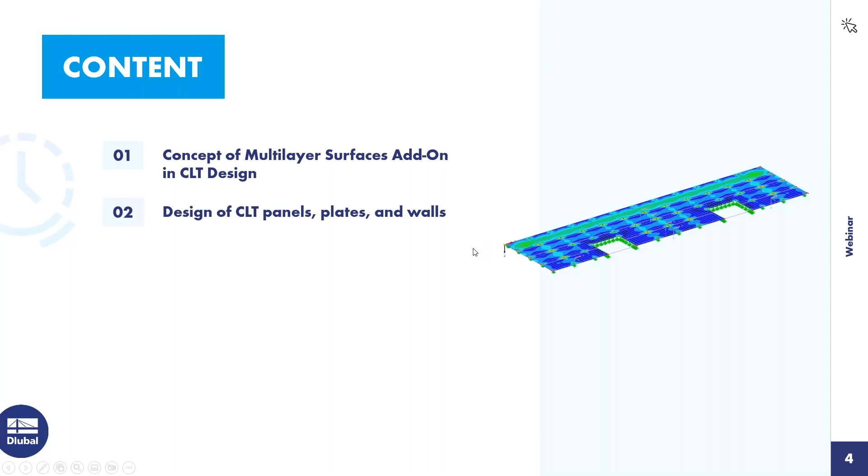The main topic is the design of CLT panels, plates, and walls. The third point is hints for modeling and results evaluation. Then I hand over the screen to Bastian and he can start.

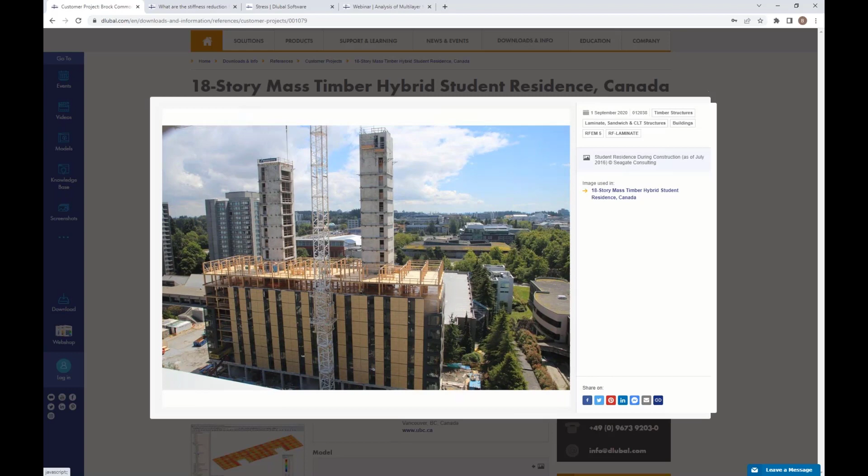Thank you. What I want to show you today is actually separated into two smaller models. The first one is based on a customer project, which we will just model from scratch and design. It's the Brock Commons building, 18 stories and 53 meters high, standing in Vancouver, Canada. It's just because it's a perfect structure, and we will actually design one story of it.

Therefore, we directly go into our new program RFEM 6 and will create a new position. I don't want to lose too many words about how you arrange models, and we are not doing a theoretical introduction into the design process, but a few words can be said about how the general model is going to be defined and how you can assign it.

First of all, we give it a name, for example 'Webinar CLT 2D Plate'. In the second register, we are activating the add-ons, or what we want to design. So what do we need to do today? Of course, we want to define a CLT floor.

For generating the stiffness, you would need the add-on multi-layer surfaces. It's written in brackets there, e.g. laminate and CLT. So it's not only for timber or CLT, it can also be used for example for glass and several other products like carbon fibers and so on. Wherever you have several layers of any kind of material lying one over the other and you want to generate a stiffness from it, this is the add-on that you would need in our portfolio.

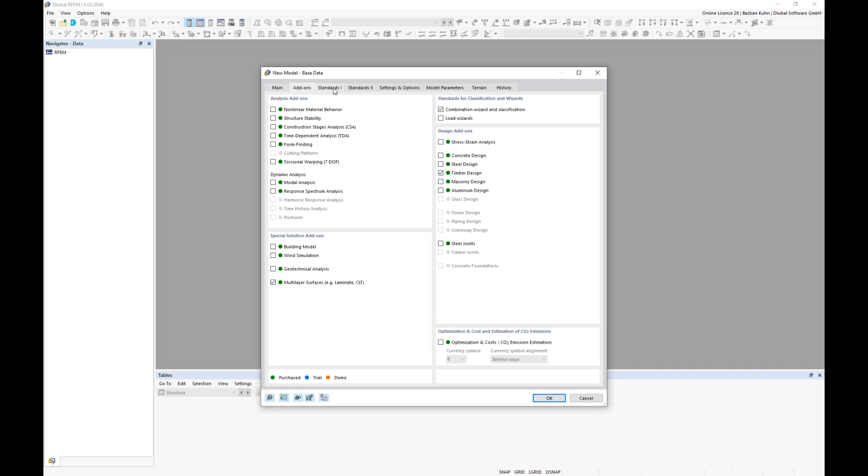We are not concentrating on load design or creation, that's why we switched that off and jump to the third register, standards, as we want to design for timber, so for CLT, and we are in Germany here.

I'm using the Eurocode with the timber annex, in case I would be designing in America, Canada, Switzerland, or elsewhere, I would have chosen another standard. I can keep the global national annex, but of course for each country in Europe there are several national annexes you can choose.

In general, what you are doing with these annexes is that you can assign deformation coefficients, the KDEF. In this case, I'm designing in moisture class 1 and therefore use KDEF 0.6, which is already predefined. But in case I want to use another value, I can choose that there.

Okay, timber design, it's the same as what counts for the load generation, and therefore we can skip that now from the explanation.

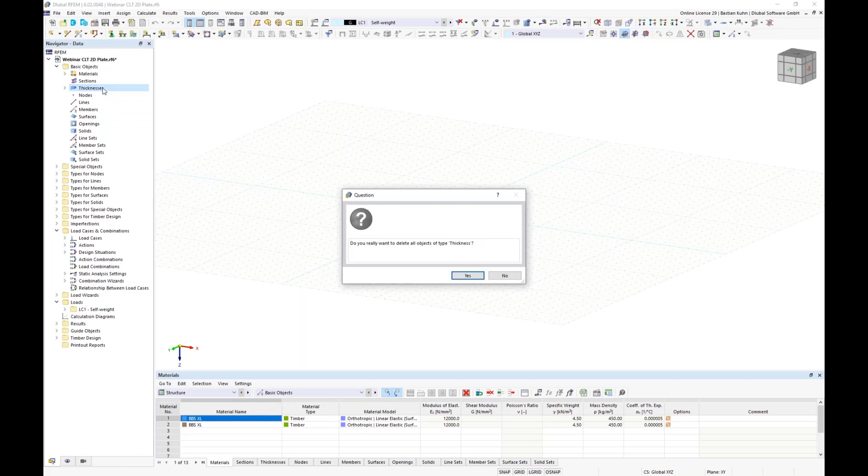Okay, then we are in the screen of RFEM 6 and directly will define the new thickness. Sorry, I wanted to start with a blank sheet, therefore I wanted to delete thickness and material because I want to show you directly what you have to do.

So if you go in here and want to define a surface, you first create a new thickness type here. And because I have activated the add-on multi-layer surface, you have here a thickness type layers, what we will be using today.

So when you choose that, you see that thickness and so on can no longer be introduced in here, but a second register is opened where you can define layers.

There you can also directly go to the material database and choose an orthotropic material model. And if you go to the library, you can see that we already have a few producers there. So there's Binderholz, Haslacher, KLH, Züblin with the Leno itself, Stora Enso, and so on.

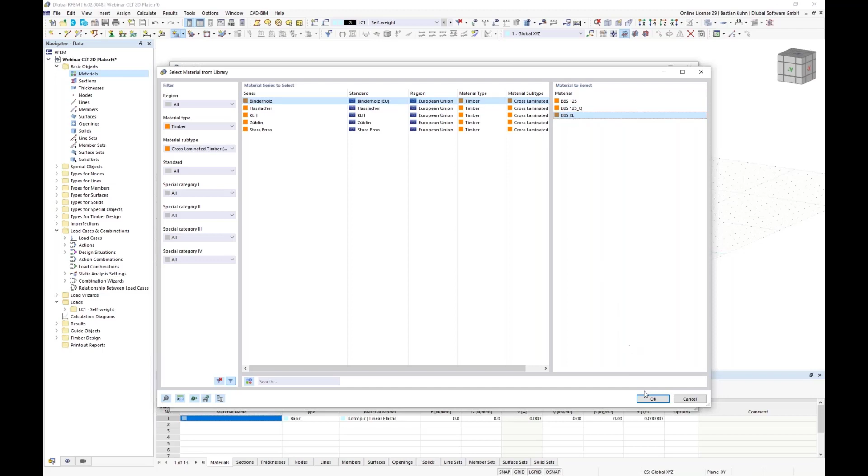I will be choosing directly Binderholz with the BBS XL because I want to show you what exactly this is doing in here, because now I've chosen this material and it took directly from the database the correct strengths which the producer, in this example Binderholz, gave us, especially the verification or the strengths for the shear stress verifications are something where you do not have any values from standard.

And so if I had chosen an ordinary C24 material, I would not even have this strength here and would have to assign them. Okay, so now this is predefined and ongoing.

It also made a stiffness of 12,000 Newton per square millimeter in the X direction, and in the Y direction it is 0. I said it already, we don't want, or we cannot give you today a theoretic introduction into our design.

Therefore, during the modeling process, I will show you our homepage where you want to take a look into the manual, and we offer also special trainings for that, what I will also want to show you. But now, just as I say, in X direction it's 12,000 Newton per square millimeter.

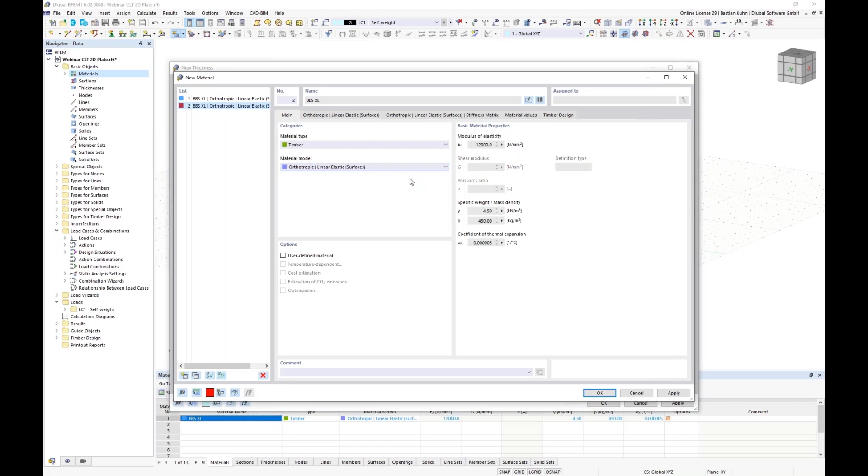So that's here. Here I'm exactly using the same material model. There's no difference in between this. So also the material values, they are the same. It's, as I said, just a graphical reason.

Yes, you see now that it's red, and it also in the rendered material afterwards, it will also be red and blue. Yeah, just a personal point.

You can also save this setup to a database, so of course we could use it for the second model that we want to create today. Therefore, we name it now Webinar CLT or whatever name you want. And then later on, we can load it from a template in here.

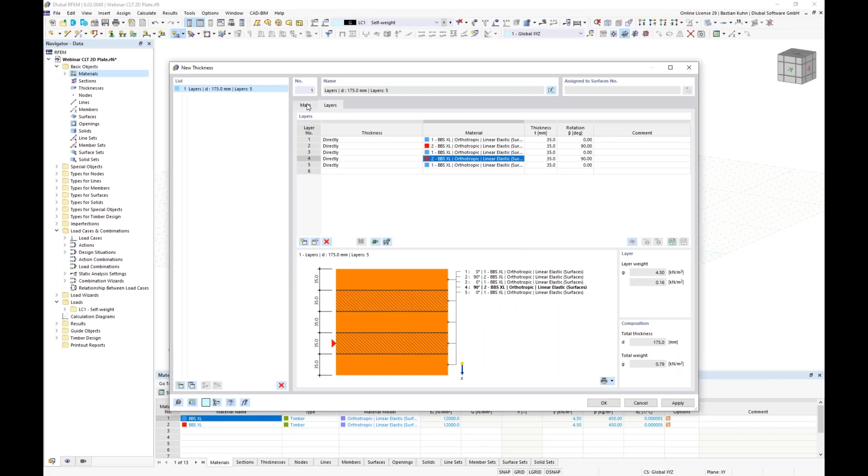Ongoing, what I missed now is the stiffness reduction, because when we are calculating with the shear stiff transfer of the load, we have to reduce the shear stiffness in some parts. So the drilling stiffness K33 and also the in-plane shear stiffness K88.

I will also show you a link later on where this is described more detailed. Here on the bottom of this register I have options especially for CLT design. I could use glue at narrow sides. The reason is that most producers glue their CLT at the narrow sides for the production process. They do not assign it for the stiffness, since the EY is still 0 there, but they use a little bit higher shear strengths. For stiffness, because of cracks in the boards, they are not increasing it or regarding it.

So in the first model, I will glue it at the narrow sides, and in the second model I will show you the difference, what happens when you switch it on or off. For now, we're using it glued.

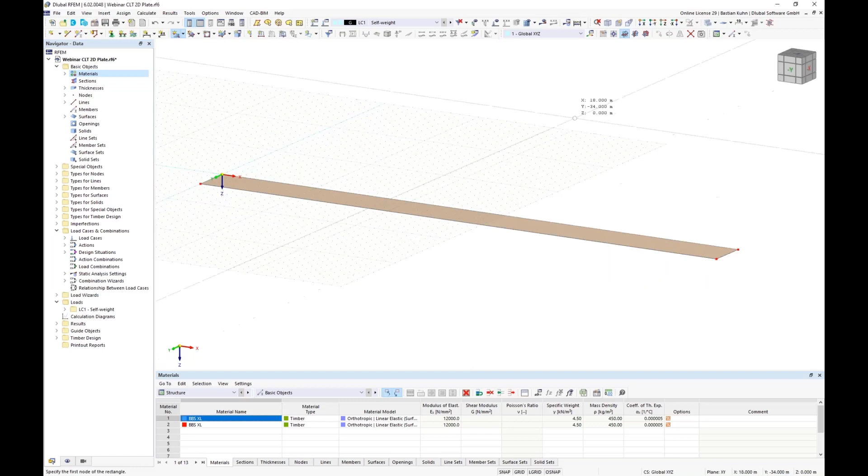Of course, I know it's not possible to produce a 55 meter long board, but there are options to calculate such things also stiff for the rotation. I want several boards with a width of 3.5 meters in the Y direction, where the higher force can or should be regarded. I'm using the dynamical size of the grid and will now copy the system 3 times into the Y direction with a value of 3.5 meters.

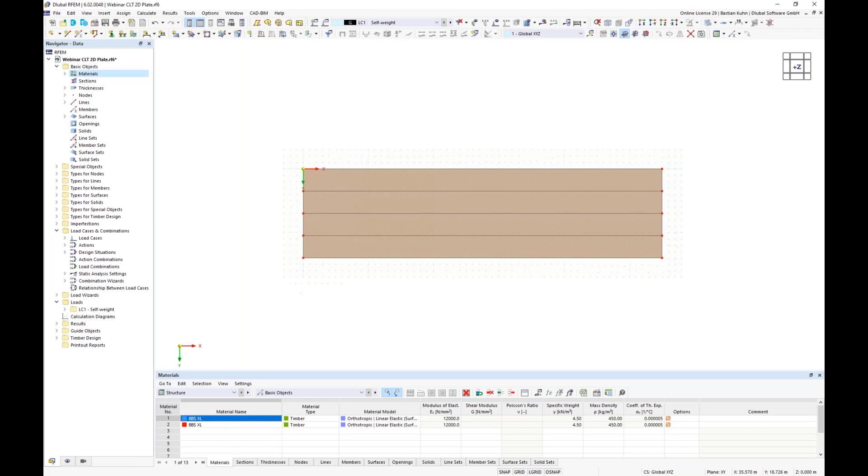So there it is, and I want to show you now why I used the rendering in there. We switch here to the view screen and say surface. No, now you cannot see it. Sorry, I have to go to model, solid model, surface, filled including thickness.

Now you see that's the only reason why I did that, because you can now see each layer in here, and it also becomes much better visible how the layers are oriented.

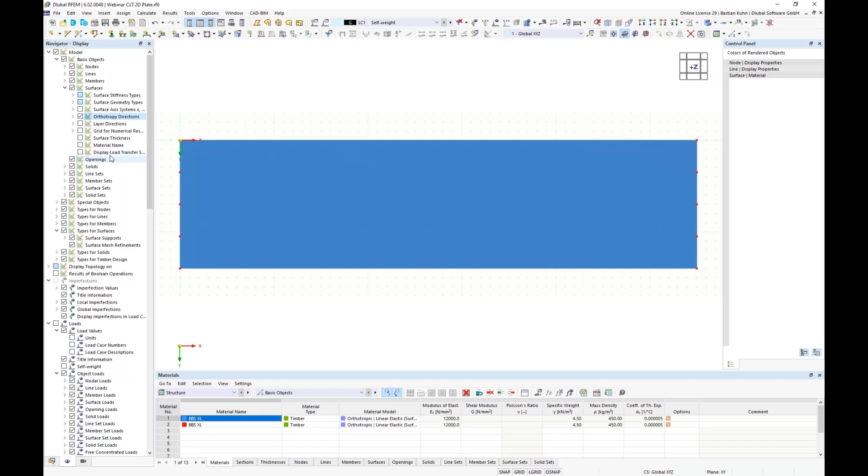We have implemented here in the surfaces a so-called orthotropic direction, because the material model that I explained is an orthotropic material. But if you switch that on, you see nothing happening. Why is it like this? Because now the layers are oriented in 0 and 90 degrees.

If you want to see how they are oriented, you first have to switch off the rendering, and then you can see how they are oriented. If you switch the indices on, you see that layers 1, 3, and 5 are oriented into the X direction, and layers 2 and 4 are oriented in the Y direction. So my main stiffness is in global X direction. That is what is important in here.

Okay, so that's the model. I can right now switch that off and divide these 2 lines by 3 nodes, because these are going to be my stiffening cores in the center. They are made from concrete, and I'm just attaching to this.

That's how it was assembled in the building in 2017. They have a width of 6 meters, and the second core is at an origin of, let me take a look, 37 meters. I'm not using the exact values from the building, just to have it close to the structure that we have in there.

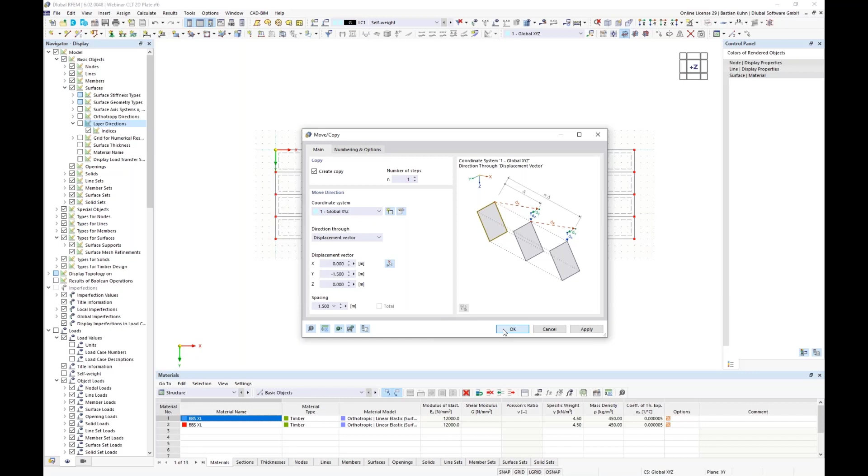This 3 nodes I will also just copy once by minus 1.5 meters. Say okay, and then I have it there, and I will draw a few lines in here and there. This one I will copy via drag and drop onto the right side. I will connect the lines in here, and then it's okay.

A very nice function, not a feature, is if you right click in here, you can divide the surfaces by integrating lines. And now you can just delete the surfaces which we do not need.

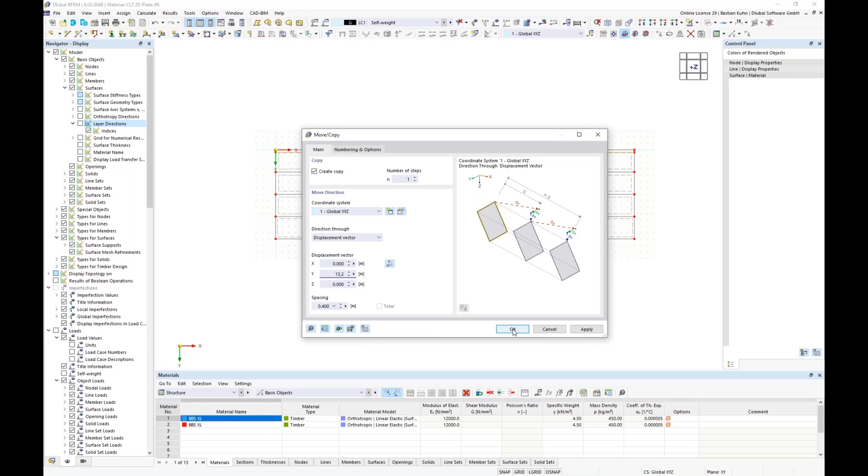The facade is running on the outside of the structure, and the supports are laying on the inside. Therefore, we are copying the outer line now about a value of 0.4 meter in the Y direction, and this one also at 13.2 meters as well, also with one copy.

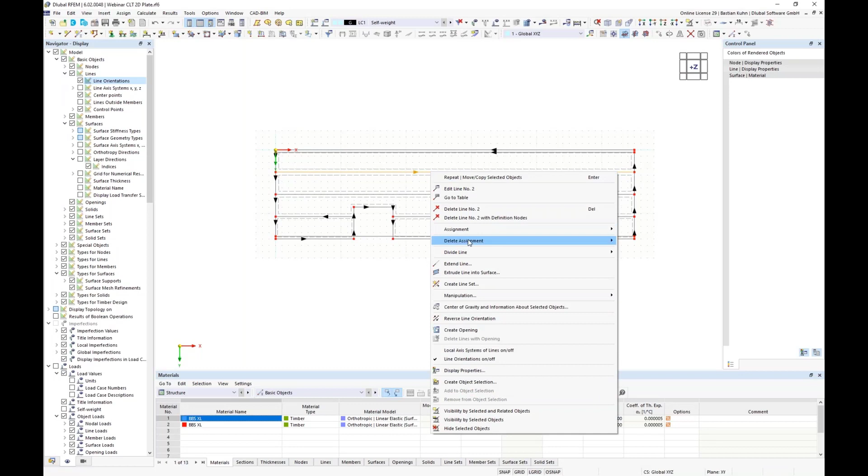I will take the inner lines, and before I do that, I have to look for the orientation of these lines, which also works via the display navigator: lines, line orientation. And now you see that this line is not in the same orientation. Therefore, I will use reverse line orientation in here.

And now that I'm in this dialog, I can also take a look if my line axis system is similar. Now that I changed it, it is important later on in order to define the slip between surface number 1, 2, and so on. I will explain that when I'm doing it. But first of all, for the supports, we want to divide the lines in here.

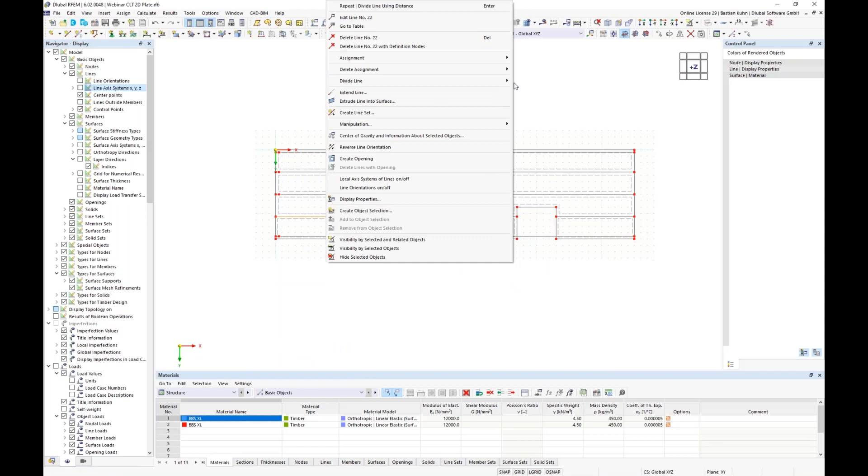Say, okay, divide line, distance from the end is 50 centimeters. Still forgot one. Sorry for that. Divide line with a distance at the end 0.5. Okay, it's not happening again because I have to do it here as well. So divide distance, and then at the start also 50 centimeters.

Okay, now this is how the supports will be running, and of course those are not enough supports. We need more columns in the structure. We now also have to divide the line by n intermediate nodes, and what's also a very nice function in RFEM 6, which has been improved compared to RFEM 5, is that you can now create a line without dividing it. You could do that in RFEM 5 as well. That's not completely true what I'm saying here, but there are more options for it now.

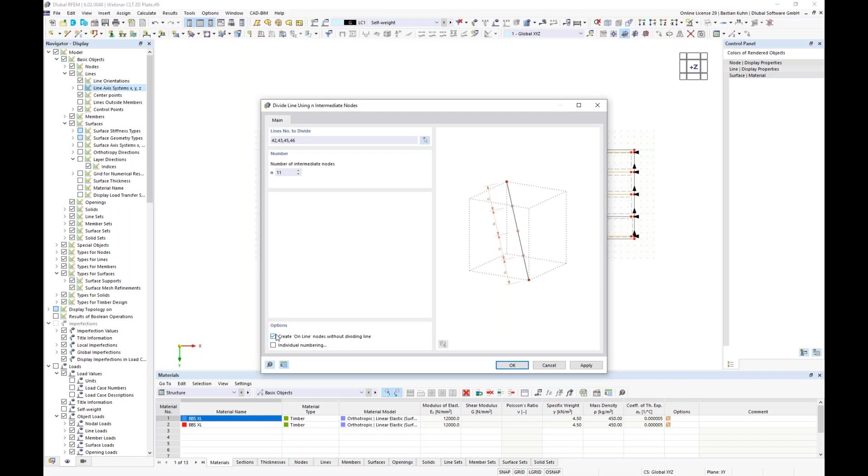So I'm copying it 11 times, I think. Yep. 11 times without dividing it. Yeah, that's all. Okay. Now the structure is nearly there. I just have to interconnect that. Actually, that's not really necessary. I could also have left it like this.

And for the inner line in here, of course, you also want to have the nodes copied there. The shift function is deselecting what you do not want to copy. And now I'm doing one copy with a value of minus 3.1 meters, and now they are there.

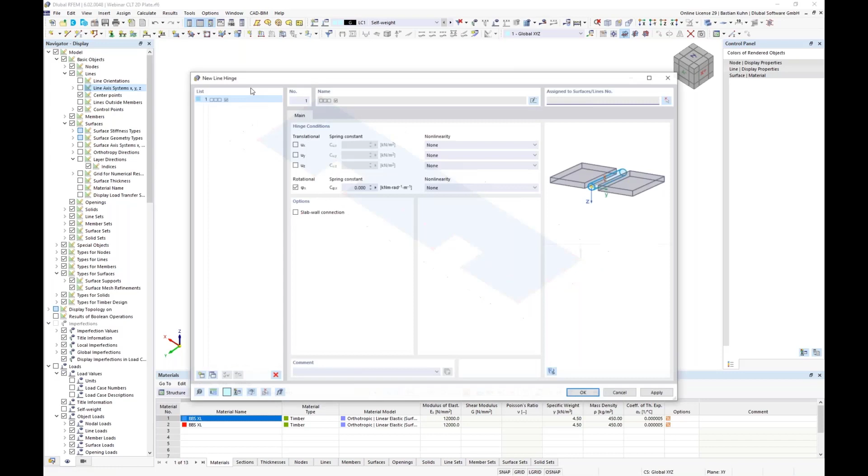Okay, I introduced it already several times now, and the question is, how can I define a slip in between this structure in here? That would be done with a line hinge. The line hinge is also very much improved in RFEM 6. If you remember RFEM 5, you had to do a lot of line hinges on such a structure, and now it is possible to do it for only one object. But still, you would have to define a slip here in UX and UY direction.

And therefore, for the first time in this presentation, I want to jump out a little bit and show you a very simple calculation in Excel. I just want you to know how I get this value and not grab it from heaven or somewhere. I'm calculating a slip between the two plates in here based on some very simple equations.

You see it here, K ser equals the density times height, times the diameter of the connection, divided by 23. That's it. And it gives me for a screw a value of 2,576. What's always important in your design process is how many connections per meter you can assign. So if you say 3 in this example, it will give you a stiffness of 7,728. If you use 4, 10,000 and so on. So the equation is very simple. You only add these together.

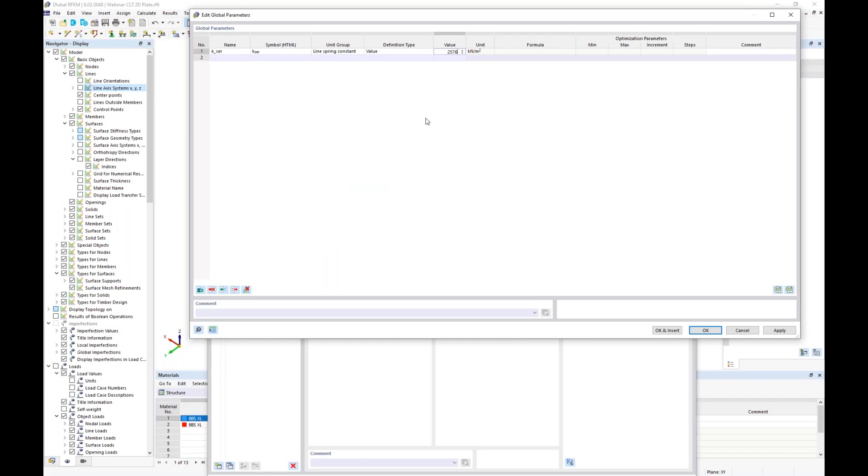Sorry for this little excursion, but as I said, I didn't want to present it as heaven sent. If you have this value for the slip modulus, you can go into our global parameters and name it, in this case, K ser. In unit groups, you already have a lot of values that you could use, and we want line spring constant, and this gives you this value in here. Okay, insert, and now it's there.

So that is not really a big step, because if you only have this, what does it bring you? You design the structure and find out, okay, 3 connectors, that's not enough. I need 4. I need it stiffer. Then you always have to jump in here and define it. And also for your documentation, the printout report, you have nothing.

So how can you improve that? If you go to this info box in here, you see there's the option to insert object properties. And there are now also very, very many options that you can do. But we just want the simplest one of it, line hinges and comment. Say okay. And you see right now, it's a simple JavaScript function that I'm using in here.

But it has an intelligence behind, because it already tells me, okay, what you're doing here is an error. It's something wrong. And what is wrong? Okay, I need to tell the software what object I want to assign the comment to. So in this case, that's the object 1. I just have to type it here. You see it here in the list on the left side. And I forgot the addition in here. So, and now you see, well, the value is still 0, but I have something in here.

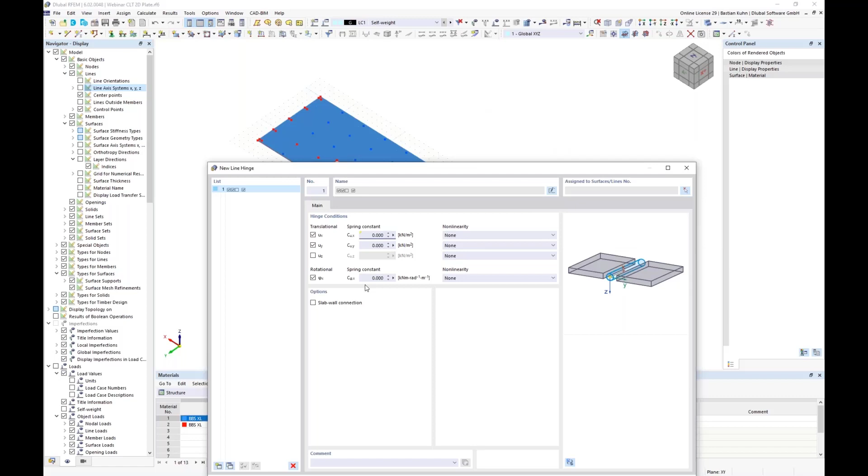For my documentation, I'm using this little slice in here. That's just something you need to Google and will find out directly. So if you say, okay, nothing changed, that's a little bit annoying. Why is it not sending that value that I want? Because you have to define it here in the comment. And if you say 3 connectors, or you can also say 3 screws or whatever it is, first of all, this comment is taken to the printout report. I will show you after we did the design.

And now if you find out during the process, okay, 3 is not enough, I need to do 4, or it has just to be stiffer, you can just define it here, and it's changed in real time. Well, of course, right now I know 3 is more than enough for this structure, because the horizontal load that I'm assigning here today is not that big. But yeah, that's something you will always find out during the design process.

Okay, so then second, we do it also for the Y direction, because according to the spring laws, you need to have it in the plate area for X and Y direction. Rotational spring constant: with newer research, it is also possible to define a value in here, but right now I'm leaving 0. Of course, you could have something similar like I did for X and Y direction, also for the rotation. And in Z direction it is not necessary to define any kind of slip. Okay, I screwed it up a little bit, but it does not matter, because I left the dialog. I did actually not want to do that.

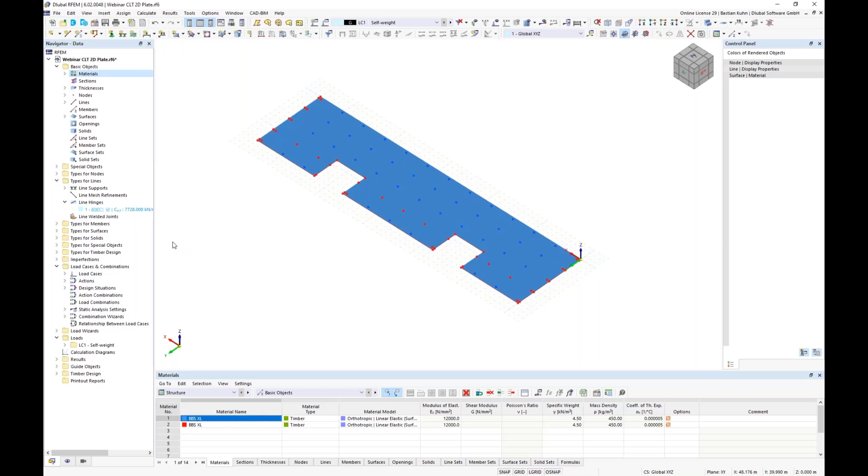If you jump into types for lines, line hinge, it gives me the opportunity to show you the advantage of it, because in RFEM 5, you would now have to open the dialog once again and also define the line hinge once again. But as this is an object now here, I do not have to do that, and can now do it correctly and choose the surface and assign it to this line, this line, this line. So wherever I'm assigning it, I'm defining a slip. So in between this plate and this plate is defined a slip, and this plate and this plate. And now a slip is missing between this plate and this plate.

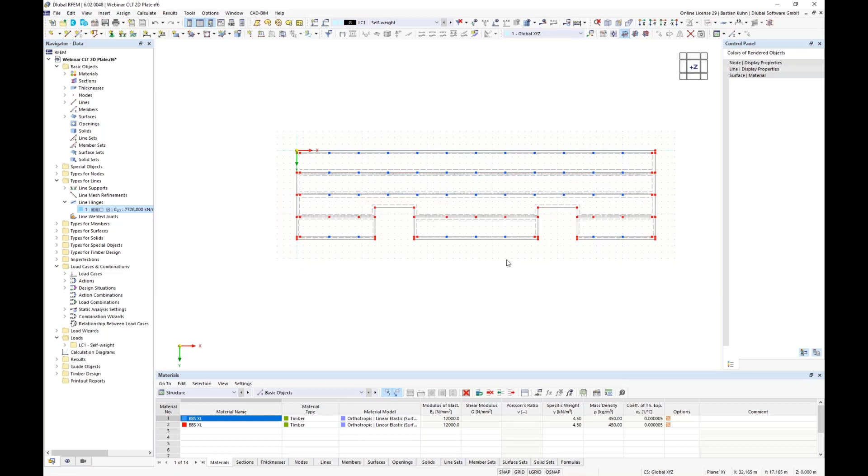And once again, back in RFEM 5, you would have to define the whole stuff once again. But in here, I just can click there, and it's absolutely no deal. So that's, to me, a big, big advantage of the new workflow. Okay, it's a little bit small. Maybe I will just increase the size a little bit, and go actually in Z direction again. That's now defined, and I can define the supports that are representing the columns underneath. They are very simple. They are just using force in UZ direction and nothing else. Say okay, and assign it in here and in there and there and there.

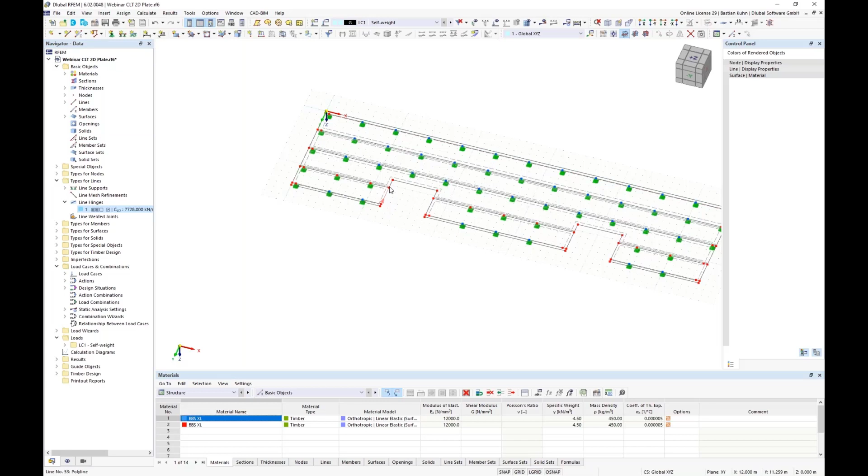That's also, to me at least, a little bit small, and we can maybe just increase it a little bit. Okay. What else do we need? In this case, when there's horizontal force, it will just move away, and we need to define the line supports from the core, and that would work via line supports, define or edit the existing ones, and we use actually the same intelligence here, but for local systems, and because we want the force just to act in longitudinal direction of the line, I will just release UX, or just give the slip to UX.

I will complete the release. That's how I want to do it. And then I'm using the same like before, using K ser. Do not make the mistake from before. And now if you go in here, it's obviously not line hinge what we want to do now, but line supports. And they're also just a simplest function comment.

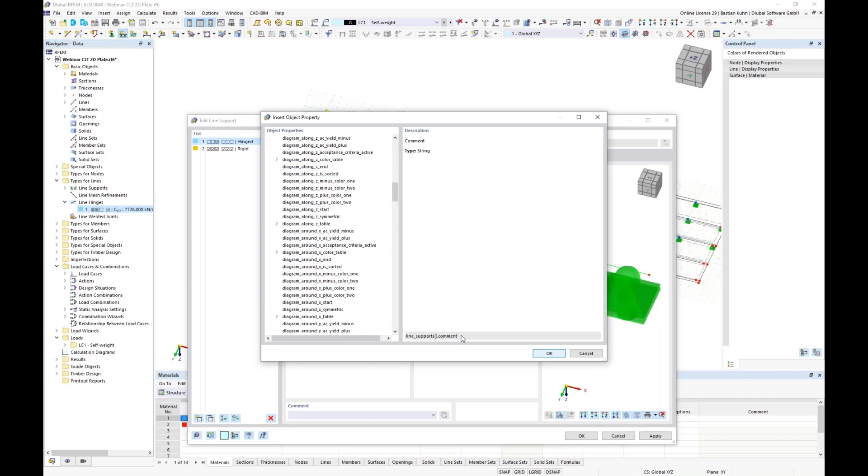You see in here, you can do a whole bunch of stuff with this. So you can have diagrams with forces coming from other directions than UX and so on. That's all included in here. But yeah, once again, we use the simplest one. So with line support 1 point, same function like before, 0.1 and this, and no error, and then we just type it here, say, what did we write? I forgot it. 3 screws, I think.

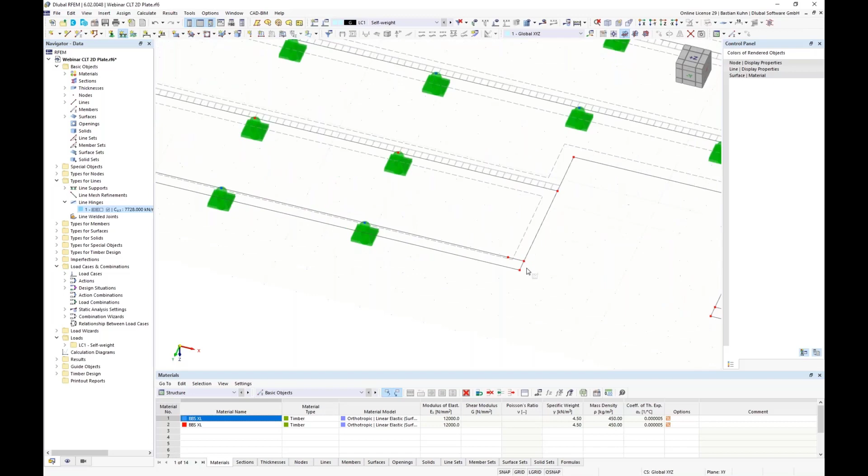And now we have it here. Yeah, works the same way. Trust me, it is like this. All right, 3, this. Okay. But we need to assign it to the lines. That I should not forget. So where do we want it? There, and there. And of course there, and there.

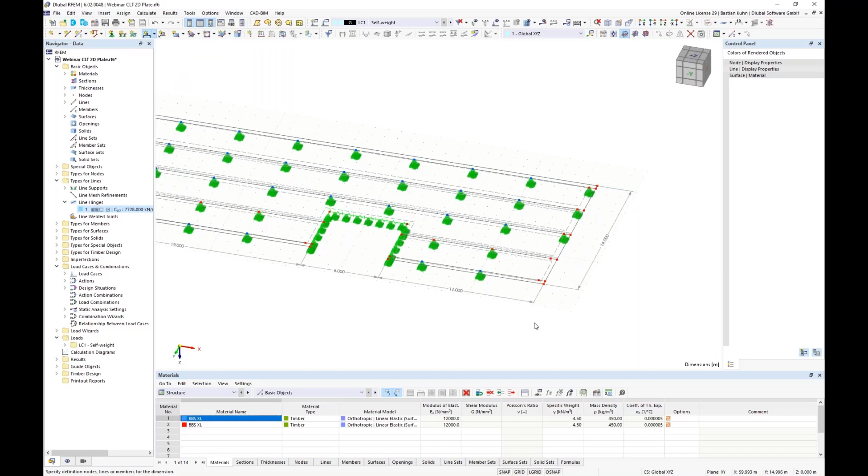So the model is now already there. Maybe we want to have some dimensions for it as well, just to have it a little bit nicer. And maybe we are actually directly starting the printout report, because there's something quite nice in the new RFEM 6 that I want to show you once we have the dimensioning ready. So okay, maybe you would do it differently when you are making the design of it, but for this I think it is now all right.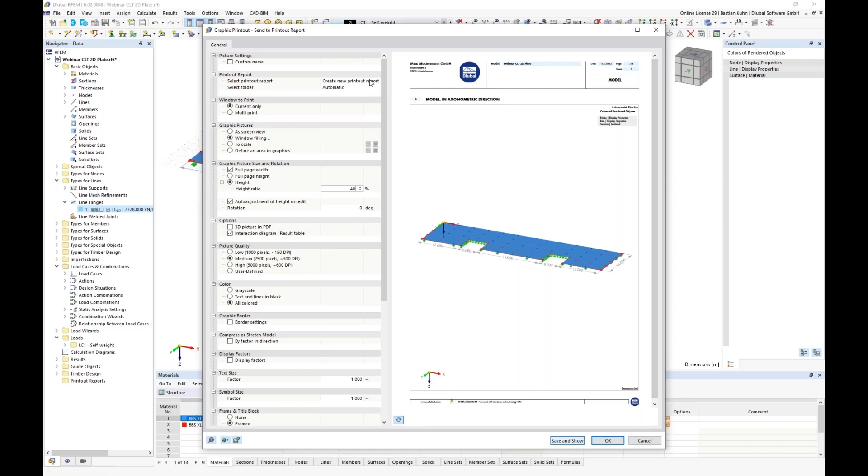And we print this graphic to the printout report, because in RFEM 6 it is possible to have the printout report opened when you are working on the model. And we will do that. We will maybe use it window filling, and maybe not, we take maybe 40% of the height. Save and show. I did not choose a printout report. Actually, I should have selected the printout report in here.

Here. So it works in the same way like the material database before. You have here templates you can choose. And I actually have created one for today's webinar especially, where I selected and deselected a whole bunch of stuff. I think we will now assign it and then go back to the design process. All right, it's generating it.

Gives me time to drink coffee, a small one. Okay, now it's there.

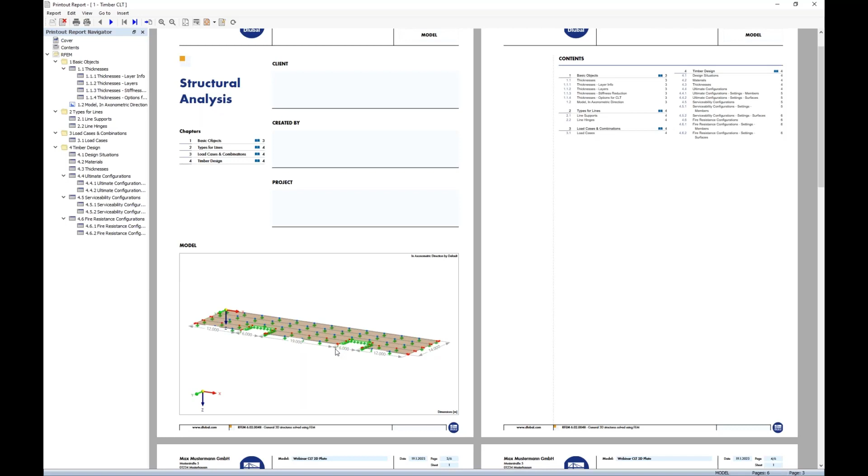Actually, I could have opened it, but we're not doing a webinar about the printout report today, but of course I want to show you what kind of points you can implement in there for CLT or for timber design in general. Okay, but here's now the model, and that's it so far. And we go back to the design process and introduce the load. Deactivate all dimensions, because I don't want to see them any longer.

And introduce the load. So first of all, we're doing a horizontal force just to have a deformation in Y direction of 1 kilonewton per meter. If you have looked at the building, it is standing in one of the highest earthquake areas around the world, so there's probably more force than 1 kilonewton per meter. Also from wind, there's probably more force. But yeah, maybe we are in the ground floor here and just have some small force.

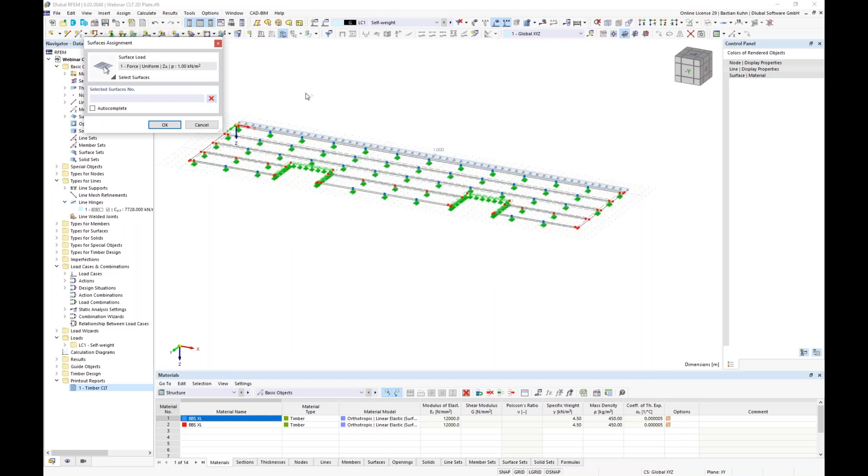Yeah, we also take a small value in load case 1 from self weight and say okay, we have that here. And now we define for each plate a live load. So this will be 5 times. Okay, and now also one of the advantages if you compare it with RFEM 5, and yeah, I worked long years with RFEM 5, I'm still comparing it, but if you are new, you do not have to compare it.

In RFEM 5, you would have to define the surface on load case 2, say okay, leave the dialog, and then choose the second, or in this case, the third load case, assign it there, and so on. This is, as you see in here, no longer necessary. All right. And last but not least, this one.

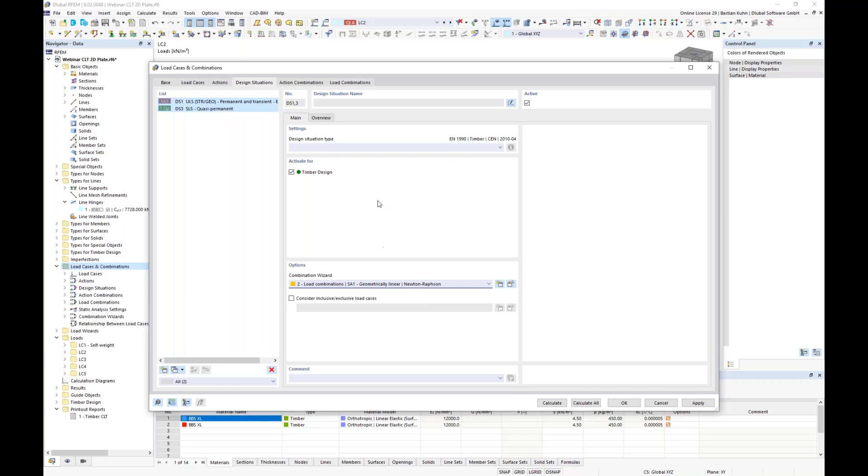Okay, so we can now also check if we did that all correctly. It's all correct. And go into the load cases and combinations. As I said, we're choosing timber here as a standard group, and for the design situation I would just use quasi-permanent. The other ones I'm not interested in, and I'm calculating according to first-order theory and automatically create my combinations for that. And now they are here, say okay.

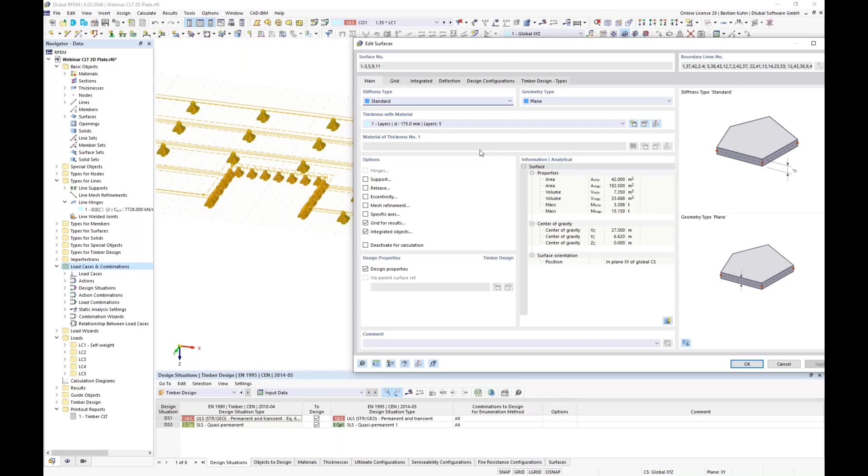And now I could have started with the design in the add-on timber design because I have activated that in the basic data, but I have to show you the objects that you can or should take care of. If you once again compare that with RFEM 5, there you have the design add-ons Laminate and Timber Pro, and all the things you have defined in these add-ons are now moved in RFEM 6 into the objects. In this case, we are designing surfaces, and so here you define it in the surface.

First of all, if you look for the deflection, you can choose deformed or undeformed system, but that's not what I'm up to. I want to show you a plate is always a little bit problematic when it comes to no clear deformation where you should consider a reference length too. So the distance between this support here on my node and this is actually 4.5 meters, if you remember what I did by copying them.

But how do you want to regard it with this other side? And therefore I choose 5 meters, because I'm choosing the difference between this point here, and you cannot see it now, but the other point there. So to me, that is now on the safe side. And if deformation gives me problems, I anyway would have to do a more detailed deflection analysis. Okay, I hope that's explaining it a little bit.

Ultimate limit state configurations. We have a combination for ultimate limit state configuration, and therefore, of course, we also have to look for the objects. The first two registers are for members, and the third one is for surfaces. Maybe most interesting for the designer is that now for CLT, it's also possible to consider a system strength factor. So that would be possible in here, and then you could increase it to 1.1, for example. The other ones are not important for surfaces, and therefore I'm not explaining them.

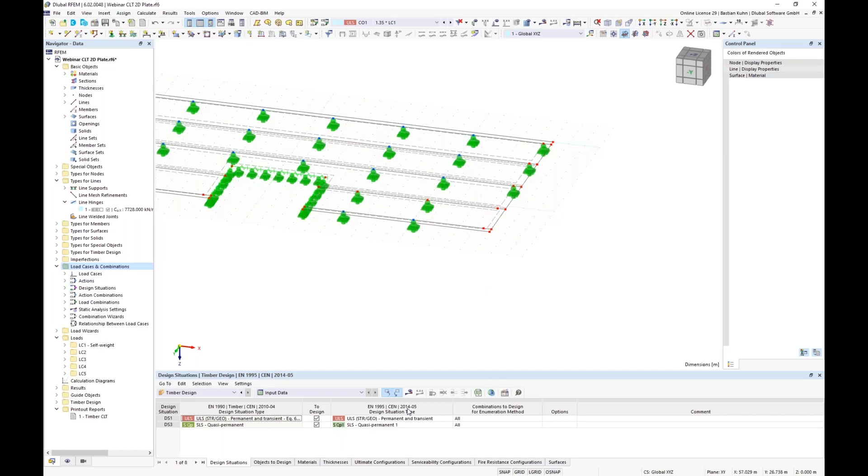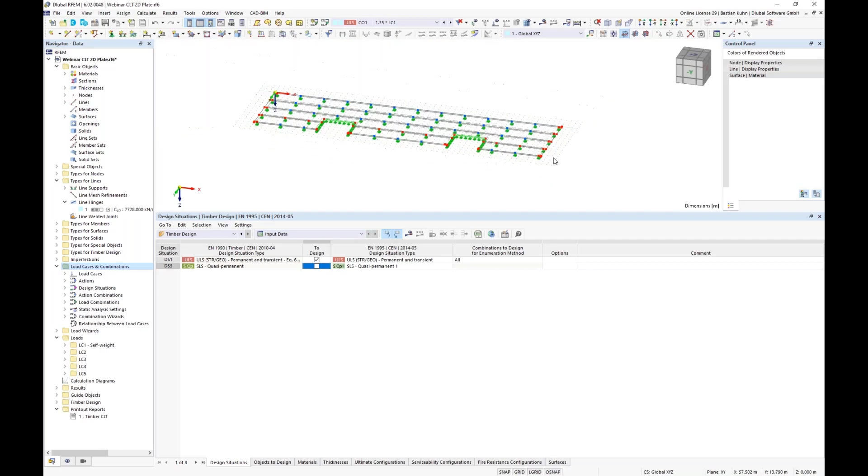Enough explanation. In the first step, I can also just calculate the ultimate limit state, because serviceability I could design when I'm sure that everything else is working correctly. Actually, see what I missed here. Here a support is missing there and also there. Maybe do some checking before we start, but the rest looks great. And I will start the design process and will give you small explanations about how the stiffness is generated and what is actually done in there. That's what I wanted to show you right away. Okay, that's opening now on the other screen.

Ta-da! Hold on. Oh, that's confusing me. I hope you see it now. Can you see it now? Maybe my colleagues can tell me. Andreas, can you see the presentation now? Yes. Perfect. Okay.

If you remember how we introduced the layers in there, just a small theoretical explanation of that. We defined a stiffness of Ex and Ey, and also a Poisson's ratio, and of course a shear modulus. And that is now defined in every layer. From each of these layers, we are calculating a global stiffness matrix, which is then exported into RFEM.

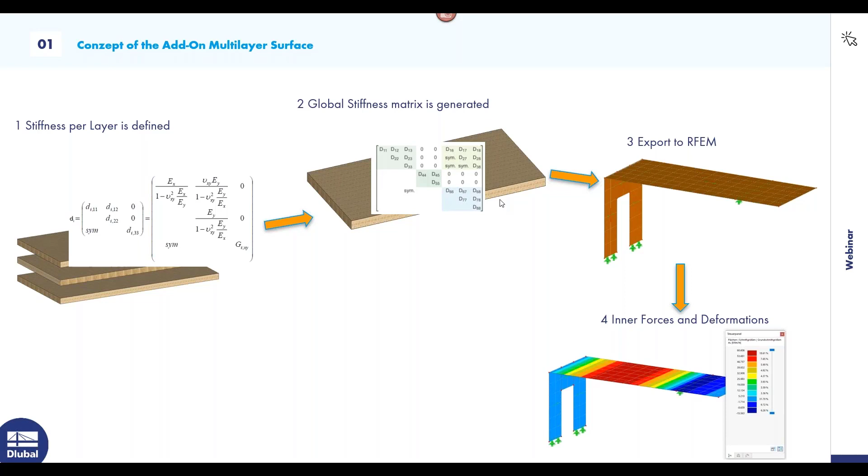And in RFEM, we calculate deformations, stresses, and inner forces on one plate, not on the whole layers, but on one plate. And these inner forces are then transferred into every layer of it. That's actually the theory behind that.

So let's see if we can get RFEM 6 back now, or maybe the homepage back. I don't know. Right now, my screen is a little bit black. We can take a look. Transfer. Yeah. Okay, there you go. I did the webinar in German language on Tuesday. There were problems with my screen. I think that's based on the software, sorry, GoToWebinar. I don't know. Okay.

We can take a look at the results in RFEM 6. Hold on. How did we name it? I think it was this one. Yeah. Okay, so you see, we have now an overloading, which is not the desired behavior because we want to be green and we want to be smaller than 1.

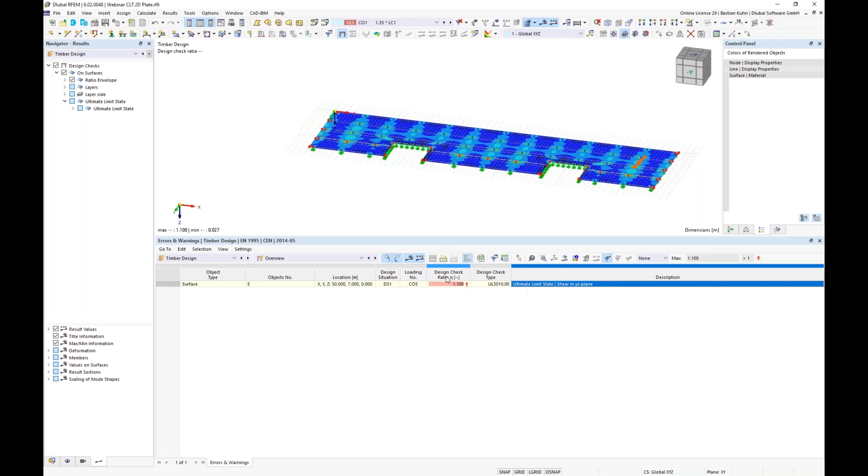But if you look into the details of it, you can see that the overloading is just in a very small spot in here. I can actually switch off the nodal supports. They are not necessary to me here anymore. There. Okay. And if you realize that in reality there's not a needle standing underneath this point, but a column with a diameter of, let's say, 40 centimeters or something else, it's obvious that you should not take the force in this spot, but you should take the force somewhere outside. And I will actually show you how to do that.

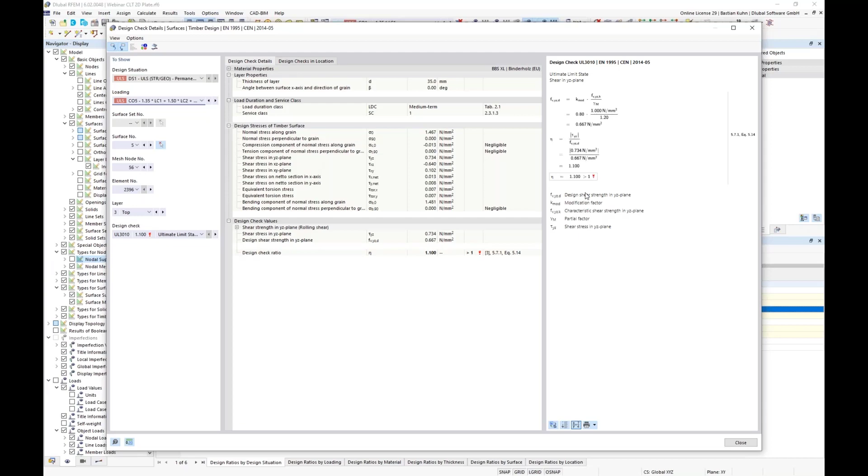In the literature, you will find this described as a so-called punch-through verification. But before we do that, we first take a look into the verification itself. Via double click, we go into the details of it. You see now that in RFEM 6 we have quite nice equations shown here, and they are also filled with values. So you have the shear strength shown here. You have the option to take a look at the ratio over the section itself. Or you see here now the several layers that we have defined. You can switch it to stress and take a look into it.

So sigma x, the bending stress, you see that where you have a high stiffness and high loading, you have a higher stress. So that can all be compared here. And of course, we also want to take a look at the shear stress, and it is usually in the center of your section. That's the same for beams, and counts for plates as well.

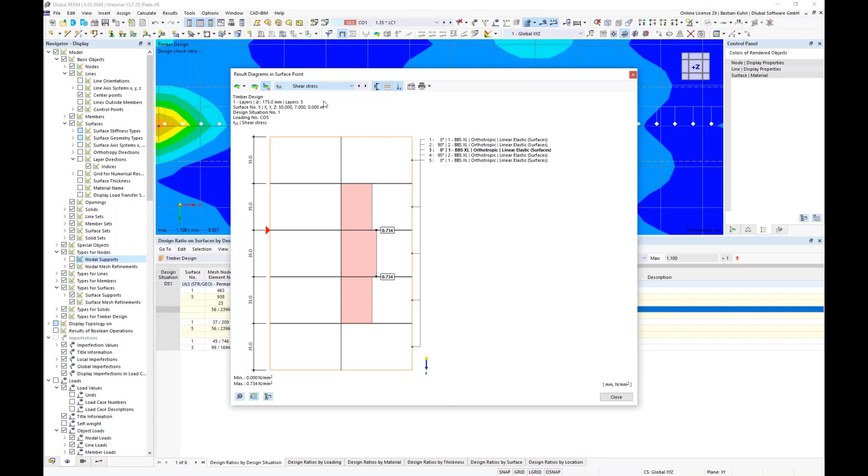Okay, you could also print such things, no, maybe not this one, but maybe this one, into the printout report. It's opened in the back, so we can just say, yeah, take it like this, maybe a smaller height. Actually, that's okay. So we just say okay, and then it's already in the printout report. We will do that later on. Say close, or I could have also left it open. It does not really matter.

What else is new and possible and very much nicer than it was in RFEM 5? If you go to the result navigator here, you can see that first of all, you now have a ratio envelope of all stresses in here. You have them here and can print them to the protocol directly, or use them for your analysis as well. You can separate between several stresses and also between several, okay, we just have one layer in here, but several layer sides, for example, top, middle, and bottom. Actually, that was not true. Here, I can choose the layer. So for shear, you would probably use one of the inner ones, and for bending, you would probably use the outer ones. That's the first nice function.

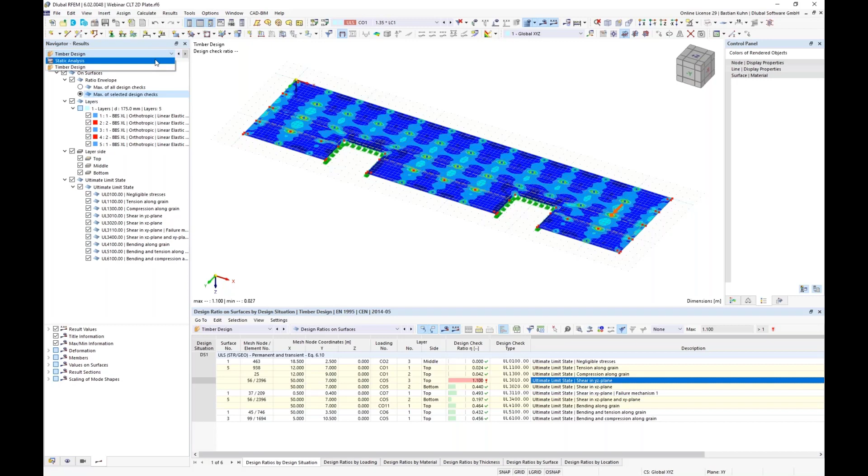If we jump back to the static analysis itself, for the connection design, when you go to the static analysis, you can see there the global deformation and compare it just to get a feeling of what's going on in here. You could also take a look here for each layer at your stresses and also your strains. That's quite interesting for some cases, I think.

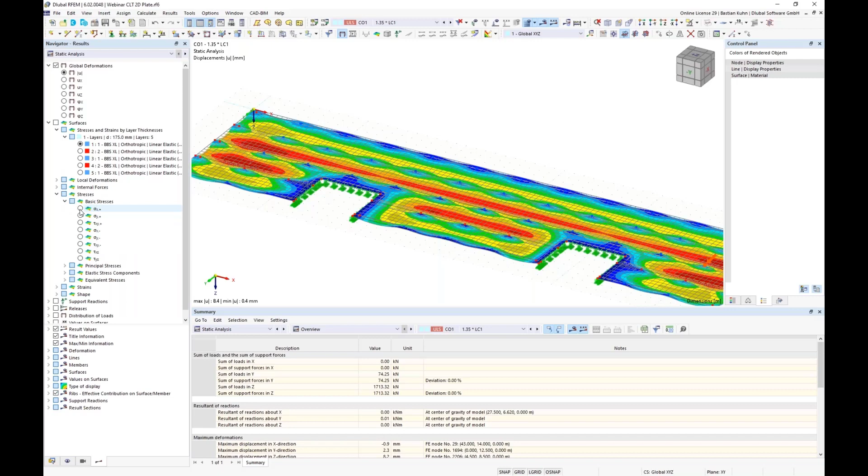If you compare sigma x on the negative side of the surface, you see a maximum value of 3.8 at the top, and if you go to the middle, it's actually quite low. If you go to the bottom of the section and choose sigma x on the positive side, it gives you the same value as the top side. So that's also something you could use for your analysis.

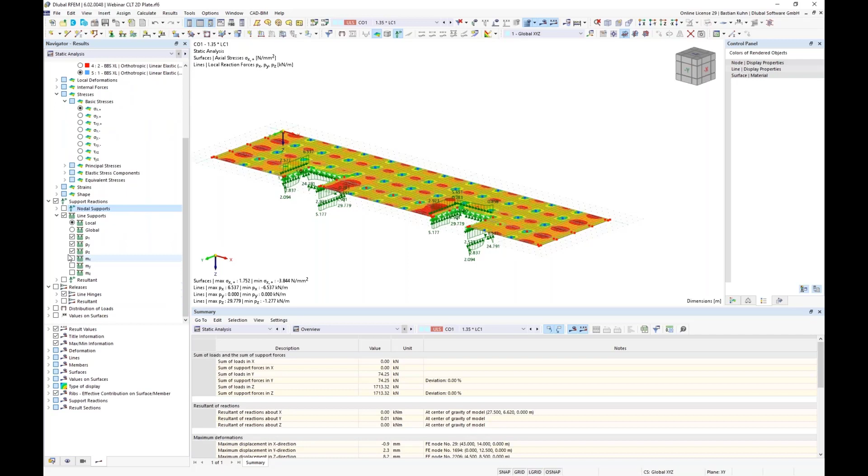Going on, first we want to look at static analysis for the connection design, so we have options here. First, the more simple verification of the connection is in the line support, because there we have a slip defined in x direction. So this is the force you need to connect with your connectors in the x direction, or in the longitudinal direction of your line.

But also for the line hinge, you can take a look at the force here, and this is the force you have to assign between this panel and this panel. Now let's take a look where the maximum value is. Well, it doesn't matter, it's here. It's quite a smooth value, and you do not have any singularity effect in the connection itself.

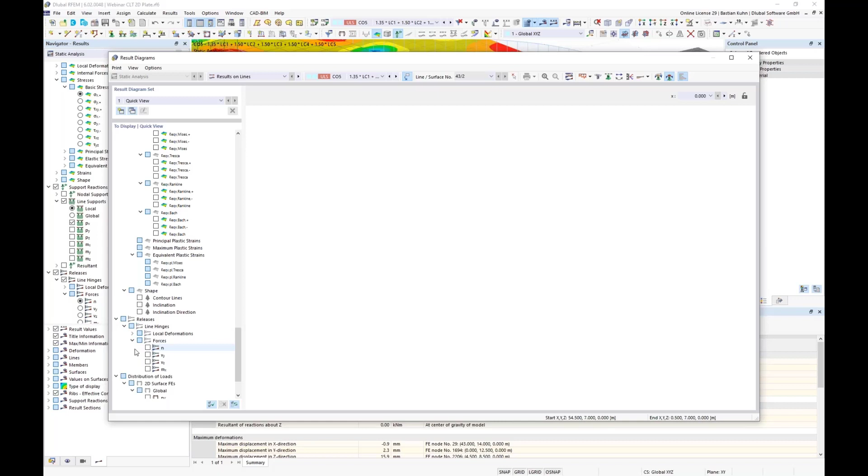But nevertheless, from time to time you will face this problem. So in the result diagram, maybe we will switch to one of the bigger ratios. In the result diagram, you have the option to smooth these values as well. You can say force, normal force, and if you look at the values, say okay, 10 meter, 12 meter, that's where I'm averaging, or where I would be able to average my results.

And if you do that and say, start 0 and 12 meter, let's say it like this, you see that you have the force that has to be attached by connectors, whatever it is, 9.464 kilonewton, and per meter you need a force of 0.789.

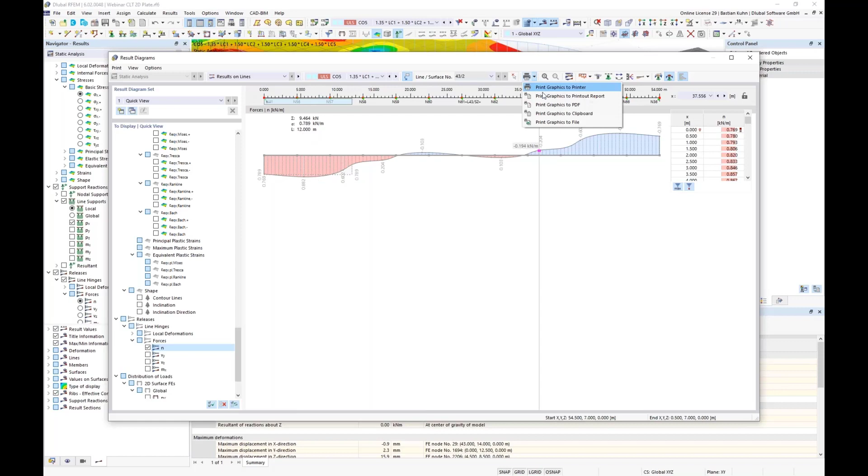So this is probably something we want to have in the printout report. We will say, maybe we will not use the full height, but something like this should be in there, and leave the dialog. Also this result diagram I would not need to close. If you work with two screens, sadly in our presentation tool we do not have the option to show two screens at the same time. But yeah, this also does not need to be closed.

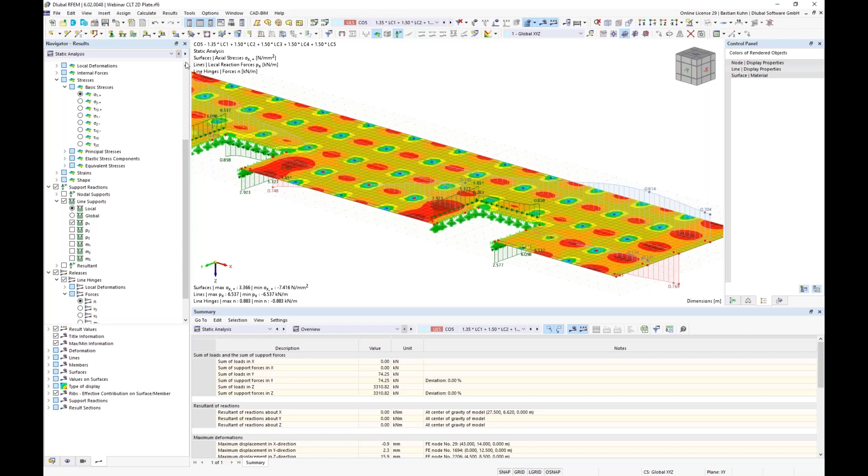Okay, but back to the design of the timber. So when you look for that, we still have the overloading in here. How can you get rid of that? It's actually similar to what I showed you with the smoothing of the result diagrams, it's just called differently. It's called insert special object, surface results adjustment. This is just for smoothing your result.

So now if we say we have a column of a width or diameter of 40 centimeters, it is definitely possible to use a dimension of 60 centimeters. I will show you the reason right away.

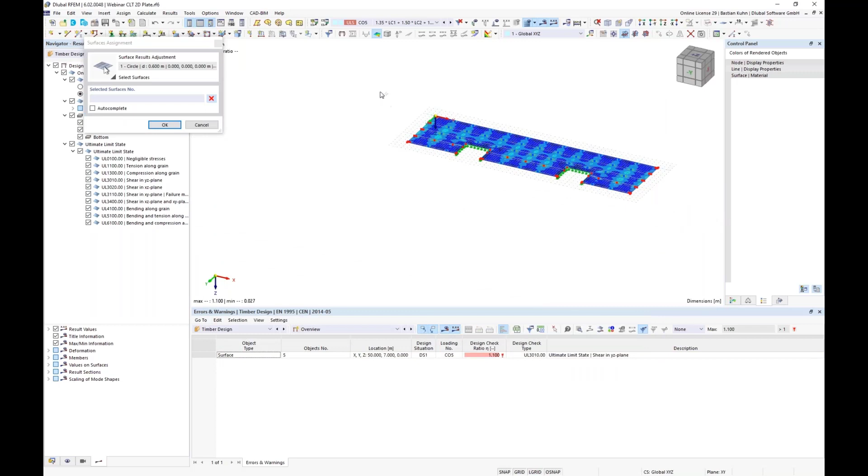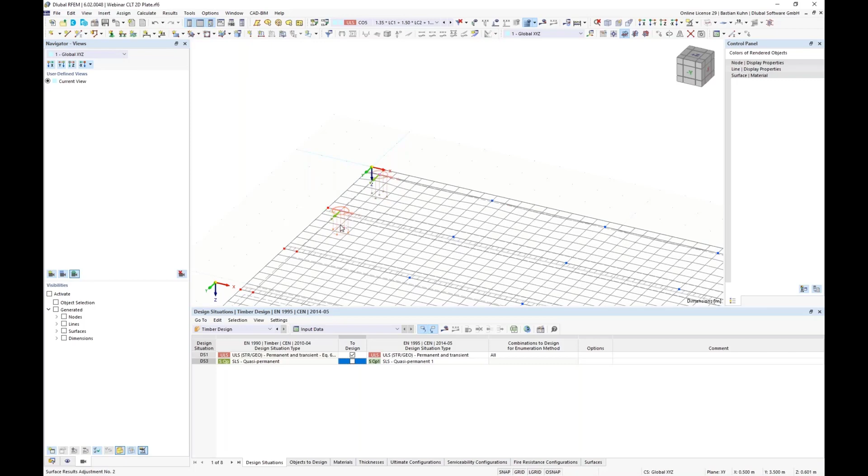Okay, I'm choosing all surfaces here, and I will define it on the origin and press OK. Not on the origin, but on the first support here. I have not shown the supports now because I've switched them off, but trust me, they are there.

So this and this, I'm just using grab and... what's it called? Grab and drag. Oh, I forgot it, sorry. So then I will copy these areas here. Let me take a look how many times I need to do that.

I wrote it, so 12 times we need to copy it, because we have 12 supports in the X direction, and by a value not in Y but in X direction of 4.5 meters. That's the span we have here.

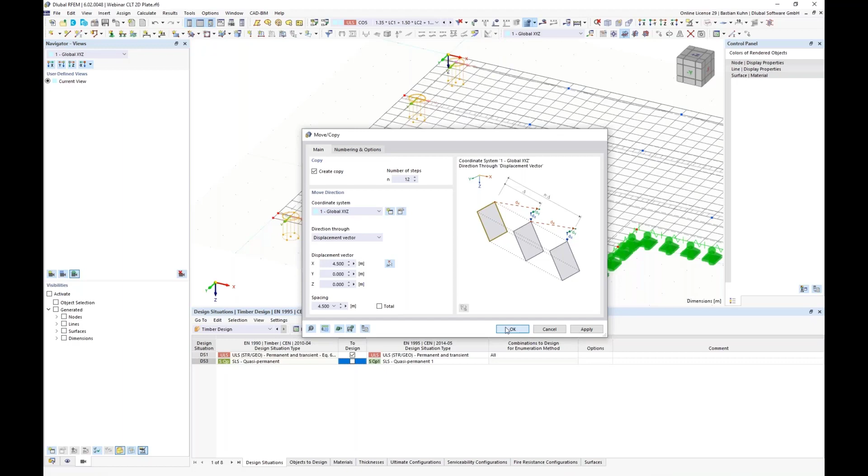So all right, go to that again. You see there's the axis system displayed for this. We do not need this, that's nonsense for our endeavors here, and it also makes it not look that good. So we will switch the axis system off.

And now we will calculate it again. As I'm sure the design process for me is finished now, I'm also selecting the SLS design to be done, and go back to our homepage in order to give you the promised more theoretic explanations.

One thing I missed when I showed you the definition of the layer and the stiffness reduction was an explanation of how the factors for K33 and K88 are calculated. My colleague Gerhard, who's now answering all your questions, can take a look if there are some questions we should discuss with the audience.

He has a very nice Excel file here, which gives you the option to calculate these values. And of course, when we have a database for the producers, we will also use the factors that the producers are offering us, so you do not have to calculate that for all the setups.

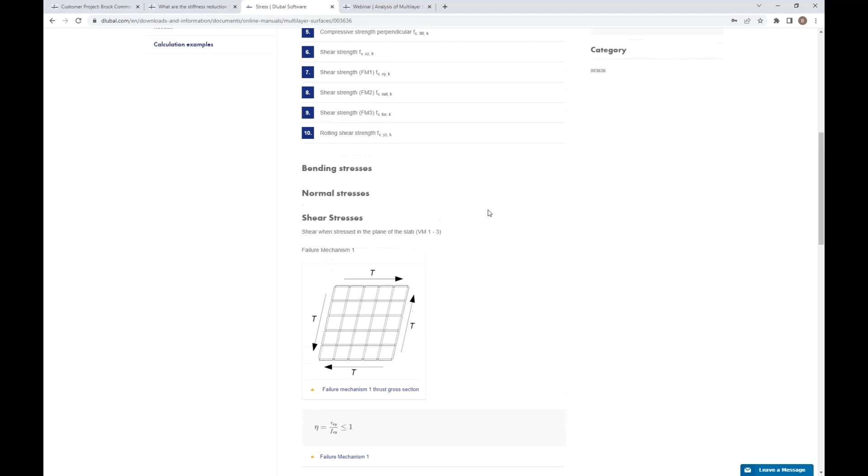The next thing I wanted to show you later on is the online manual. It's not ready yet, I'm working on it, so there are still a few points missing. A lot of customers on Tuesday's webinar asked us if it's possible to display the stiffness matrix.

If you remember, the stiffness matrix for the global plate - can I display that? Right now it's not possible, but you could download a plugin tool from our homepage or the online manual, and if you use that, you can still see the stiffness in this example. D11 is the bending stiffness for this example in the manual.

I also said that we cannot give you a complete detailed theoretical introduction into the design of CLT. If you want that, we are offering online training - you'll find it on our homepage. If you go to program version, training type Eurocode 5, that's the timber training, in March for English it's the 16th of March.

That's it. Now let me take a look if there were questions asked very often. There was a question, my colleague just showed it to me, that probably occurred more often - the question was why I defined 4 load cases for the system here.

I did this for the live load. So I have it on the outer plate and then one on the middle - oops, it's not jumping. Now it's jumping, it just took a little bit of time. So here, there, and then this one here, and this one here. I hope it can be seen correctly.

In the theoretic world, you would have to define a live load in the first field from this point to this point, then this one should be empty, then loaded, then empty again, or this one loaded, and you need to do it in both X direction and Y direction.

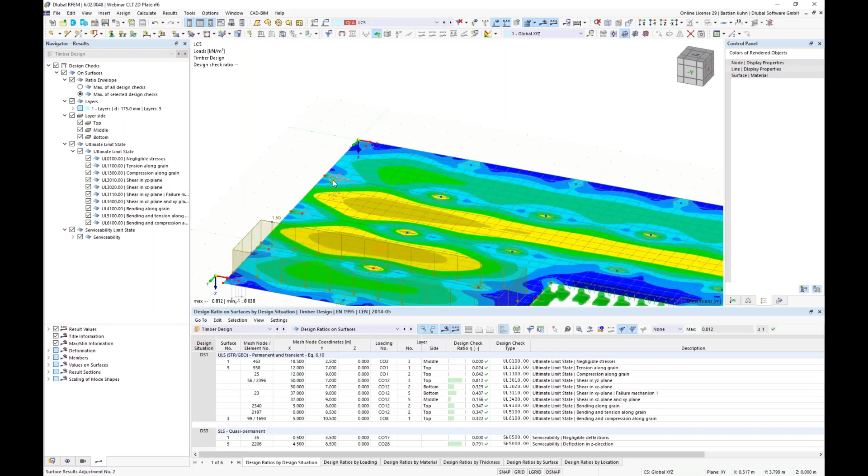But for the sake of simplification of today's webinar, I just use what I only know in German as a 'Schachbrett' loading introduction - you can Google that. I'm only using it in the Y direction, not X, because if I did it also in X direction, I'd have 10 or 20 load cases, and the calculation time would just increase.

You can compare it with a continuous beam. If you have 2 fields, you also have to introduce the live load on the left side and on the right side, because for the middle support, the highest force will be with live load on both left and right, but the highest field moment is with the force on the left side, if that's the longer span, for example.

Okay, so hope that's clear. Now we can take a look at the results, then just create a printout report and we are fine.

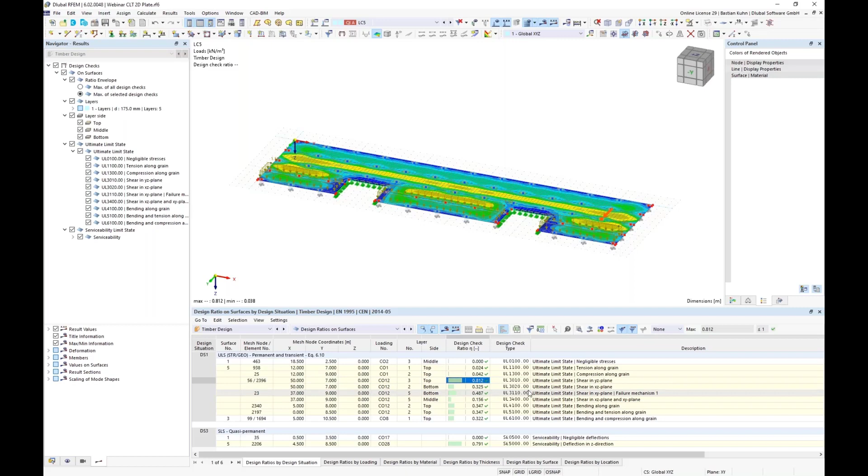The results look good now - the overloading of 1.1 is now changed into a loading of 0.8. Of course, you should make a finer mesh here. If you look, you see the span is just smoothing out about this area. But in general, that's how it can be done, how to regard the punching here, and how to avoid this overloading.

I already showed you this verification, so I'm not losing too many words on that. Maybe we just go via double click into this verification of the serviceability and also print it to the printout report.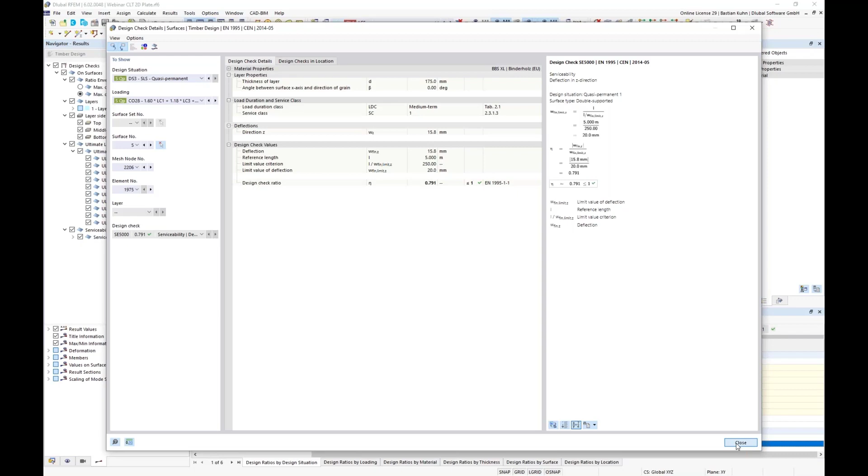You see, it's the same equations like in the formulas before. And now we go into the multi-editing of printing.

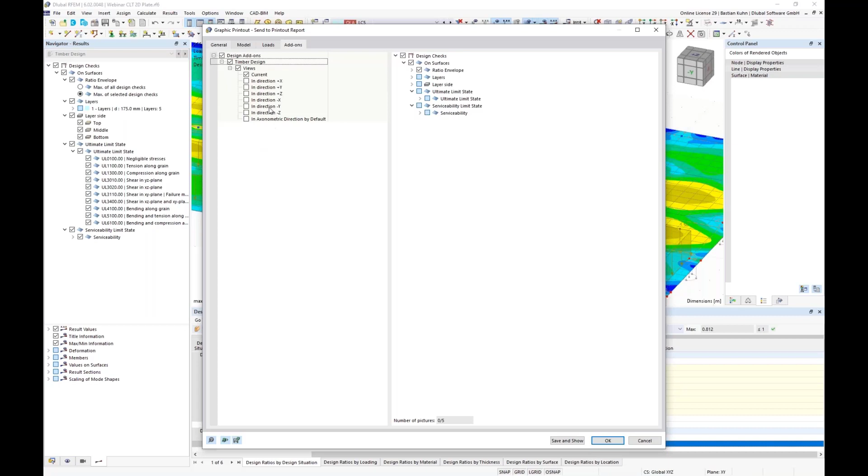Maybe actually, I don't know, it's probably a lot of results. Okay, we can try to put it in there, and we want to have that window filling.

And now we can open the protocol. I must see it's somewhere on the other screen. There it is already, I think. Yeah, there it is. Okay, now it's loading all the pictures into it. You see it on the left side, but as I said, it has been opened all the time.

And now it's printing the pictures of the load, the results of the lines. What else did we put into it? Details and stress verification. Well, we can take a look what is in there.

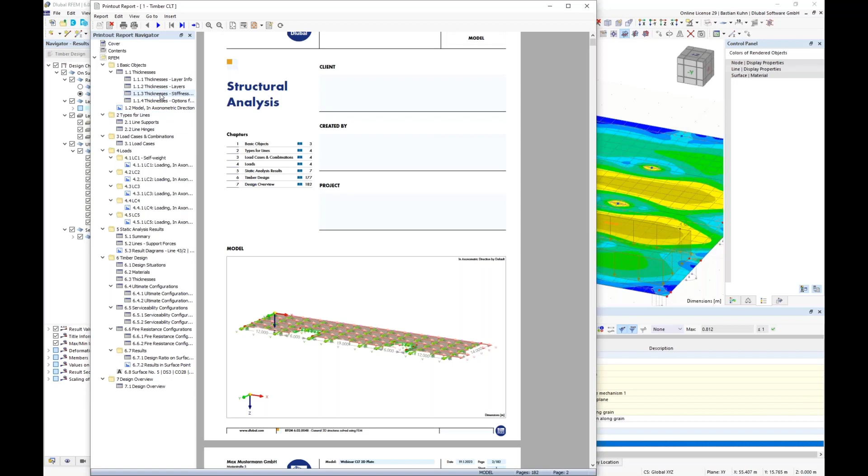I'm not going into every detail, but into some details. So first of all, the good point is that for documentation purposes, you have now the stiffness here, and you can write additional text into it. What was asked for quite often.

Here's the model. Here you have the live load, the self weight. You have the live load of all these load cases. This result diagram we have in here, it's also quite nice to have for your analysis. This diagram is printed in here, and also the deflection of it.

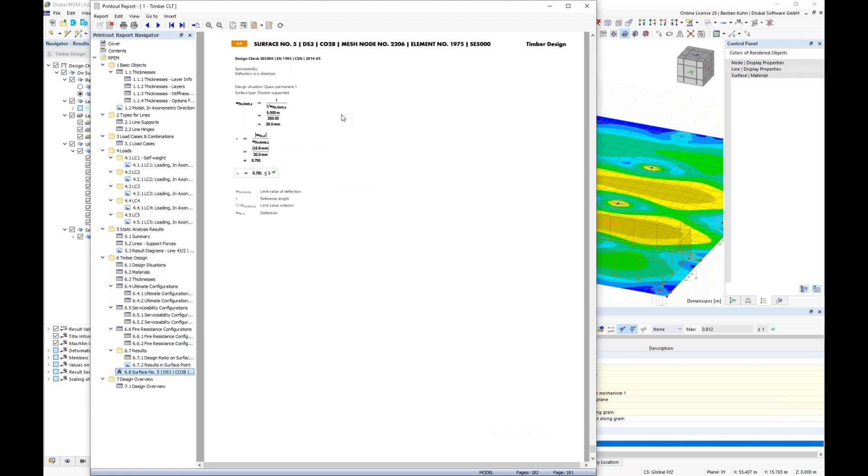Okay, that's the bigger model, and I'm now showing you a very small model which only should take less than 10 minutes, let's say. We name it wall and say add-on multi-layer timber design as well. It's the same as I did before, nothing to say about that.

And we take a very simple structure now, go into this other area and say here once again, we can now choose the material what we have defined. It's already predefined, but of course, it's also the one what I saved. It's the same material and just take it over.

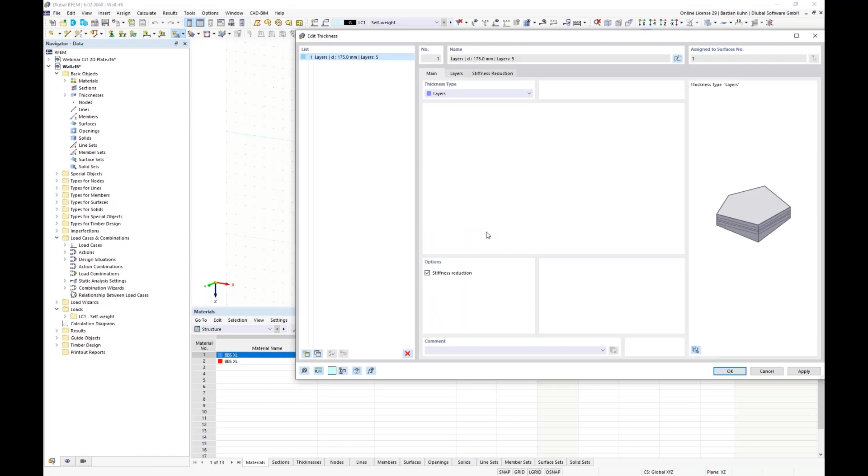Now stiffness reduction, I want to show you the difference. If you remember before, I only had reduced these factors here, but kept it glued at the narrow sides. Now, if I change that, it will actually do two additional verifications.

And now the last time I have to switch to the home page and show you the stresses, what I just announced. So if you have glued at the narrow sides, it will only do the verification of, I don't know if the English word is really 'brutto cross section', I have to look that up, but it will then not do the verification of the netto section and also not of the torsion.

It would be possible to also include gaps, so that is also then regarded for the verification. Also for this, when we have the producer material databases, we will assign here the widths that the producers are giving us. In the standard for Austria, it is recommended to use 8 centimeters, but a lot of producers are also calculating with 10 centimeters, which is also okay, I would say.

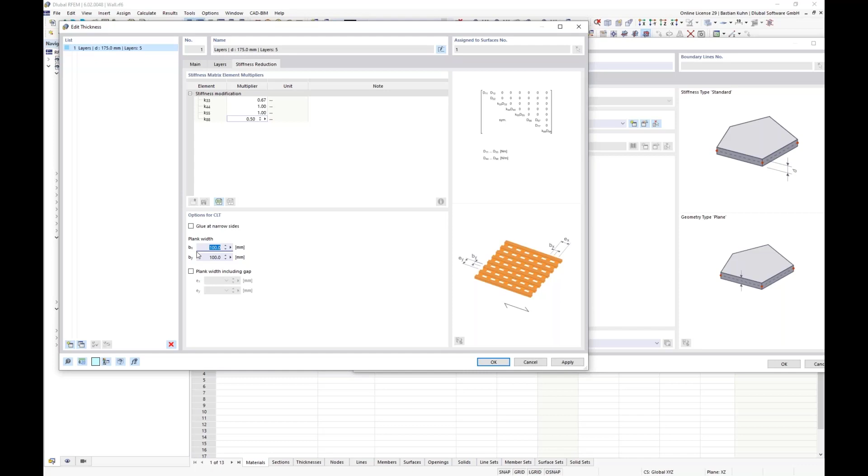So yeah, default value will be 10, and you as a designer have to say what you are using here. But I would say if you use 10, you do not do too much wrong in here.

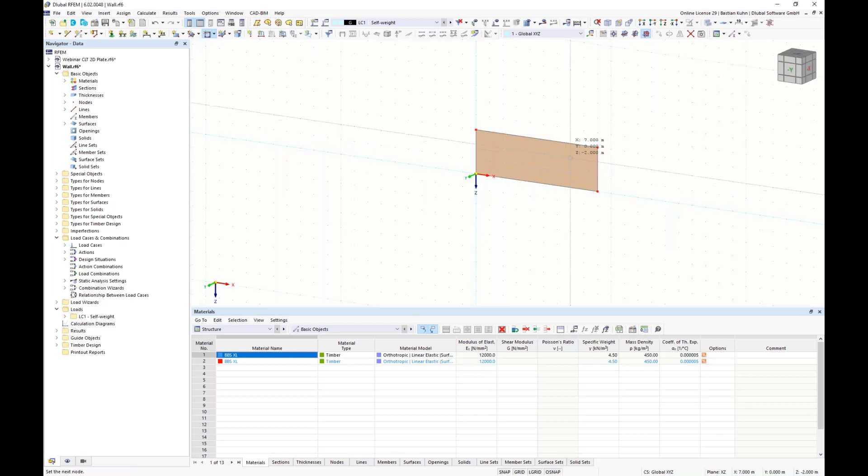So okay, we make it a wall, give it a little opening, assigned here by this, just to have it symmetric. And in order to see something there with the shear problematic, because that's the only reason I'm showing you this example here, we make it quite narrow here on the top. And because it is this kind of narrow, I have to refine my FE mesh in order to have at least 2 elements over the height of this little spandrel in here.

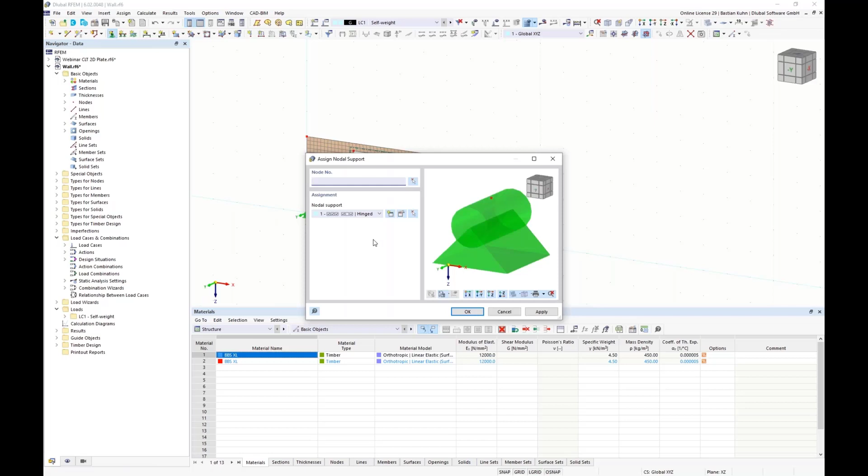We'll define its support on the left side. We'll just clamp it around for the torsion, just so that I do not have to define so much more. And on the right side, I have to define a new nodal support, movable in X direction in here. And also give it some force on the top, and the force will be 2 kilonewton, not per square meter, per meter.

And then I also will define a live load. Maybe the live load has to be introduced on the bottom because usually self-weight comes from the roof, but live load comes from the story. And that should definitely be higher than 2 kilonewtons. So let's say 10 kilonewton per meter. All right. Okay, do a little combination.

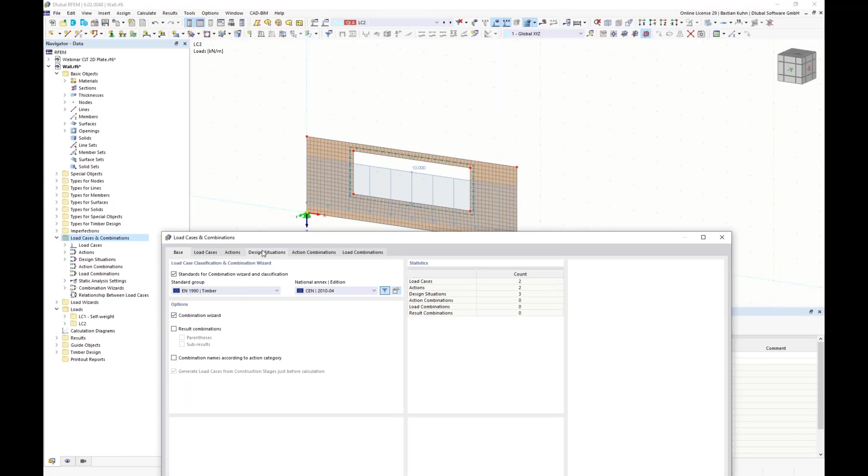Of course, I know you need to do a deflection analysis for this very narrow spandrel in here on top. But right now, I just concentrate on ULS, ultimate limit states. I'm not interested in the deflection now. Of course, you could do that and say, okay, and now I will calculate. Here, these are the design configurations. We're also not concentrating on this, but just so you saw that they are still there.

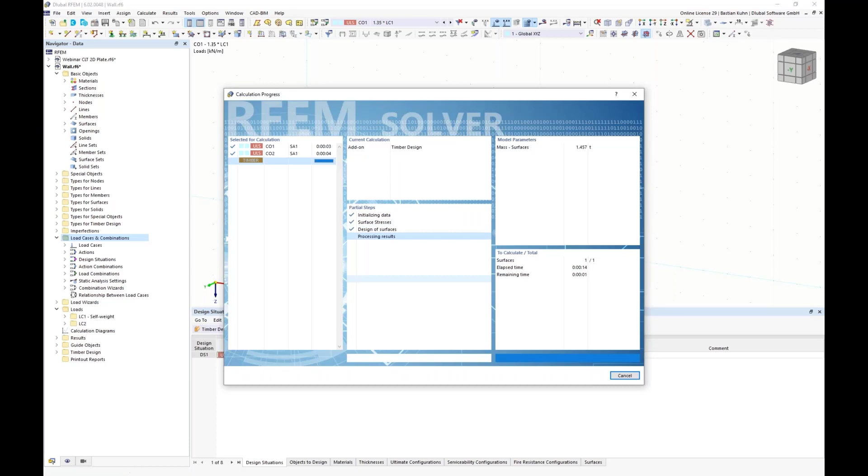And now we calculate the results of the timber. And now these two additional verifications are done. And I can show you the stress that is calculated for this. You see quite a lot of overloading. Why is that the case? Because I forgot to do the smoothing here on the bottom. So that's my fault. Sorry for that. I forgot it. And therefore you go to insert.

And in this case, we're using quite a big one in here and say this, and this on that, and say okay, and then it has, of course, to delete the results, at least for the timber design. Via drag and drop, I would just copy it to the right side, and now I only have to calculate the timber results again, and now it looks much better, magic.

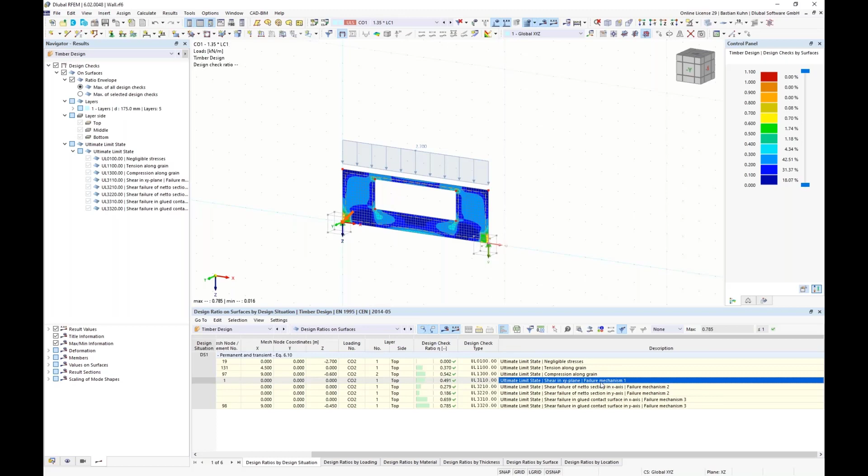And what I wanted to show you, this is the verification we already had before, but now additionally we are doing the verification of failure mechanism 2 and 3. I think 3 is the more interesting verification. That's really just my personal feeling. So you see in the details that you have the torsional shear stress of this value, and we are also doing additionally shear stress in X and XZ direction. But you see that the introduction of this is very, very low.

So the basic point of it definitely is the stress of the torsion. Okay, tau X, that's here. Of course, it's constant over the whole section. That's always the case for this kind of stress. And here you have it in the netto section, which is the failure mode 2. Okay, good. To me, it worked quite well.